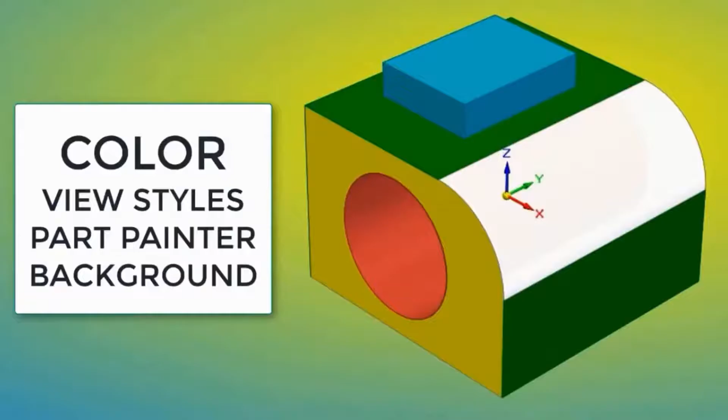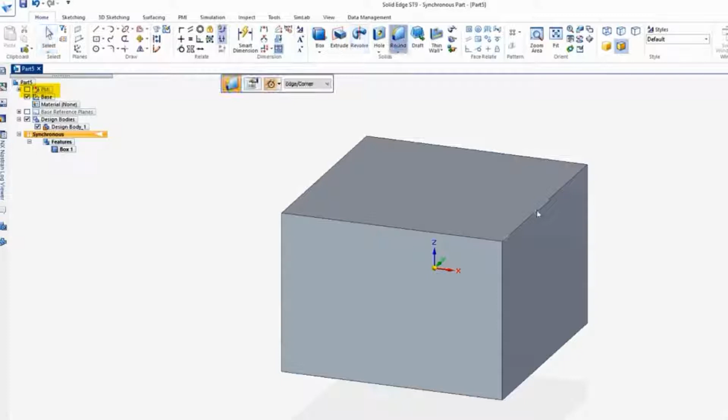Let's take a look at our view options here: our view styles, view override, and part painter. I'm just going to go out here and create a box. I'll lock it to the coordinate system here, and I'll push it both ways because it's a good idea to build around the center axis. And I'll turn off my dimensions, and I might put a round edge on here, maybe 55.

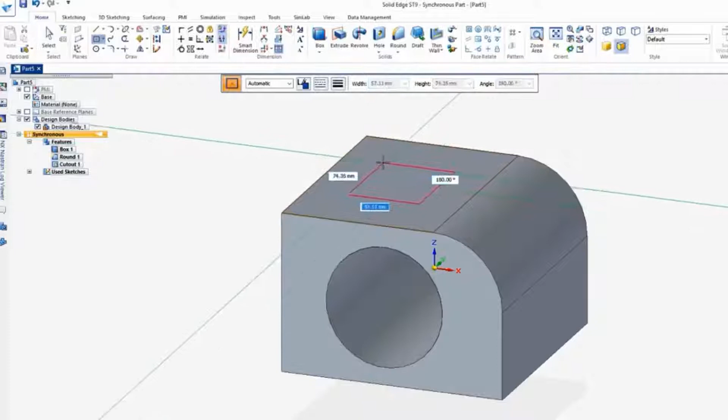Okay, so I'd like to add a couple of features also, and so I'll put a lock to this face right here, and just drop a circle here, and push that through. And maybe I'll add one more feature on the top here. Just a rectangle by center, and I'll push that up. Let's make it solid, so I'm going to hit the space bar to extrude that solid.

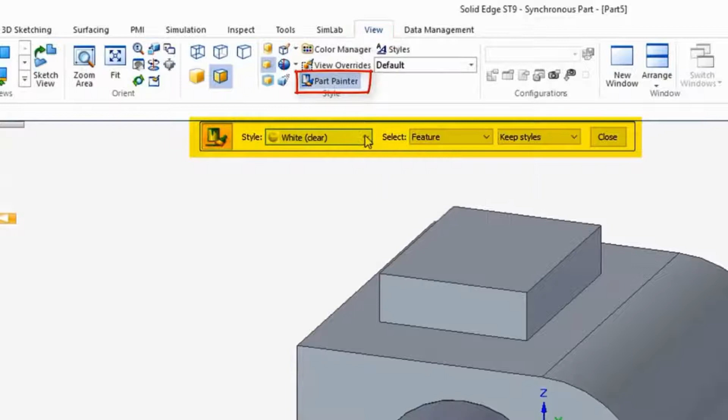If I'd like to go and change the color or be able to look through this, what I do is I go to View. Let's just go to Part Painter initially. And right now, I'm going to change my color, and let's go with cyan. I'll go cyan, and I have these options here to select any face or feature. So I'm going to pick feature first. So if it's on feature, it will identify these features.

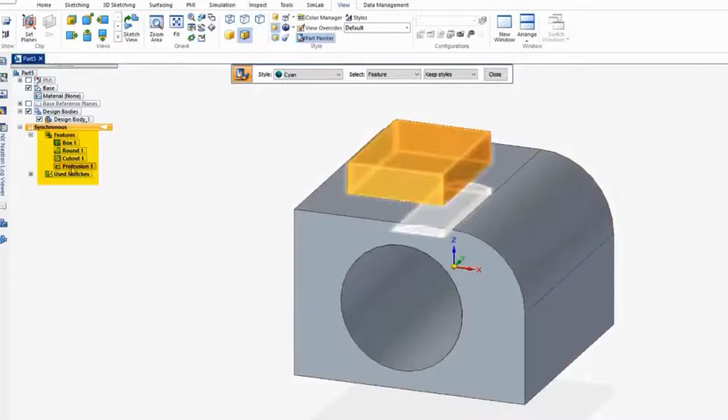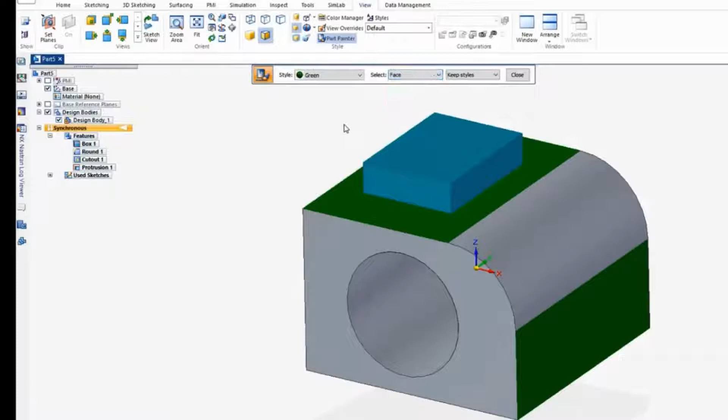And I've got 4 features, and I can look at that over here: the box, the round, the cutout, the protrusion. So it picks those up. And in this case, let's just say I'd like the cyan feature. And then I could go back and use green. And I'd like green on a certain face. And so I could turn these faces to green. So again, faces, features, we could look at changing the whole body or any, and that's how we change our color.

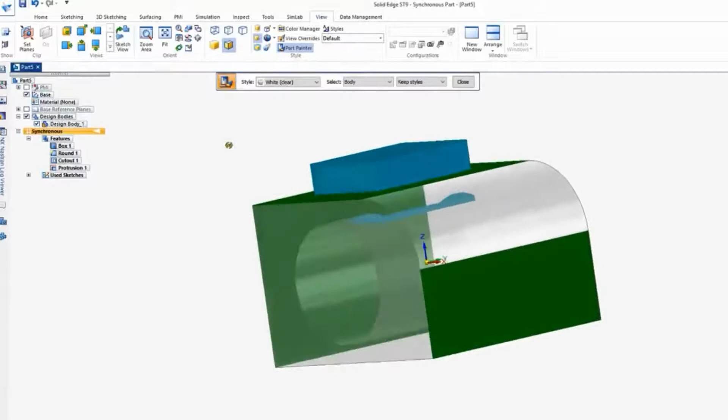Now, a lot of times I'd like to actually look through the model. And so to look through the model, I could pull down here, and let's just go to, say, white, clear. And I'll pick on, and this time I actually want the whole body. So if I click on the whole body, now I can sort of see into the part. And that's really helpful sometimes, to be able to look into the part. I would like to go to the default and change this to high quality. And so it really improves the look of your model. That's what you do when you want to create a picture or an image.

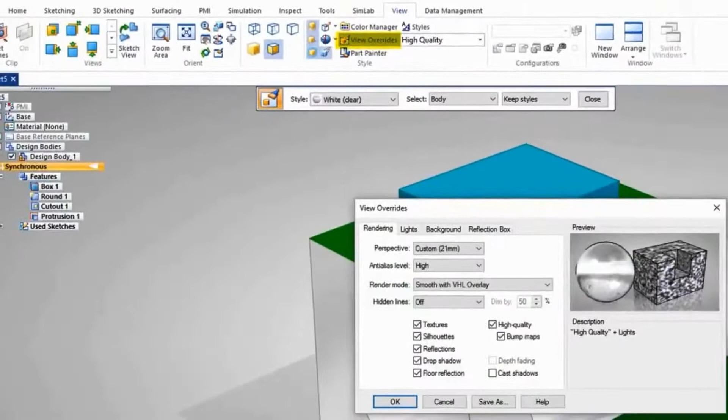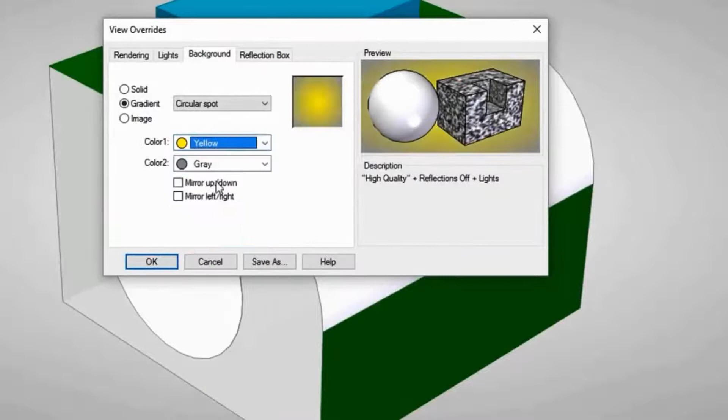Now, if I'd like to go to View Overrides and get rid of these shadows, I can just come in here and look at the floor, the reflection, and turn these on and off. If I turn off all the reflections, you'll see the reflection disappears. If I'd like to change the background color, I can go to View Overrides, Background, and say I would like this to be, instead of white, yellow, and instead of gray, light blue. This is how we change the background to give this a better look and feel.

Now, if you'd like to save your image and paste it in a Word doc or a PowerPoint, you could come up here to the application button where it says Save As, and we go to Save As Image. And then we could just go and call this whatever we like, and it defaults to bitmaps, but I usually use JPEG, and just save that.